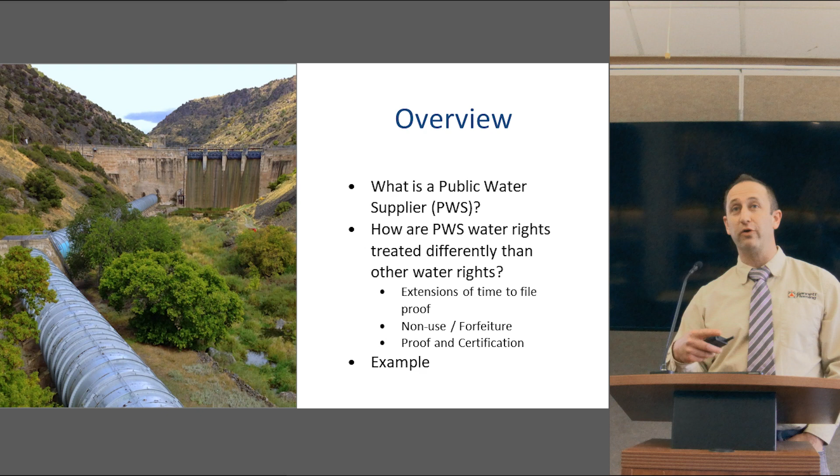So anyway, the first is a public entity. That's real easy. That'd be your municipalities, your counties, the state, a department of the state, the United States of America, or any of their departments. The next is a water corporation, as defined in a different code, it's not 73, so this is kind of exciting. It's 54-2-1. And essentially, as long as they are regulated by the Public Service Commission, they're considered a public water supplier.

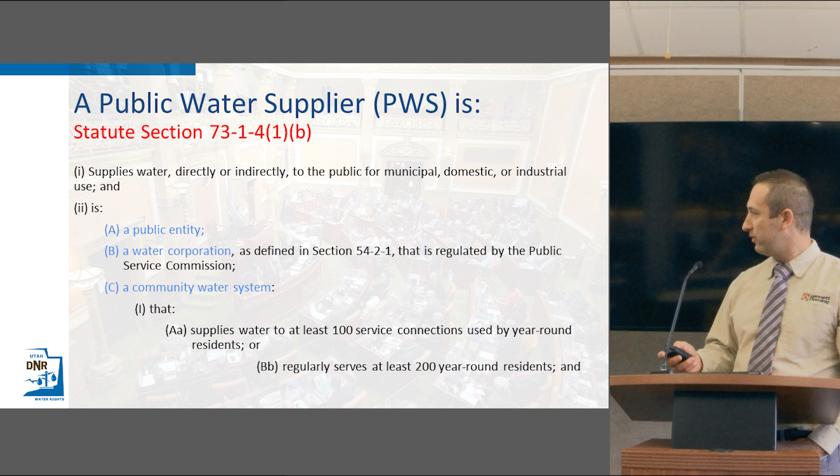The next is a community water system, and that supplies water to at least 100 connections year-round, or I believe it's 200 residents year-round. So it's one or the other. And then it's important to note that those are not the same as the requirements for being a public water supplier for the Department of Drinking Water. Thank you. Yes, sorry. Thank you.

And then it has voting members, this is still continuing on with that. So the members have to own a share in the community water system, and they have to receive their water in proportion to the shares that they own in the water system. And then they have to pay the rates that are set by them.

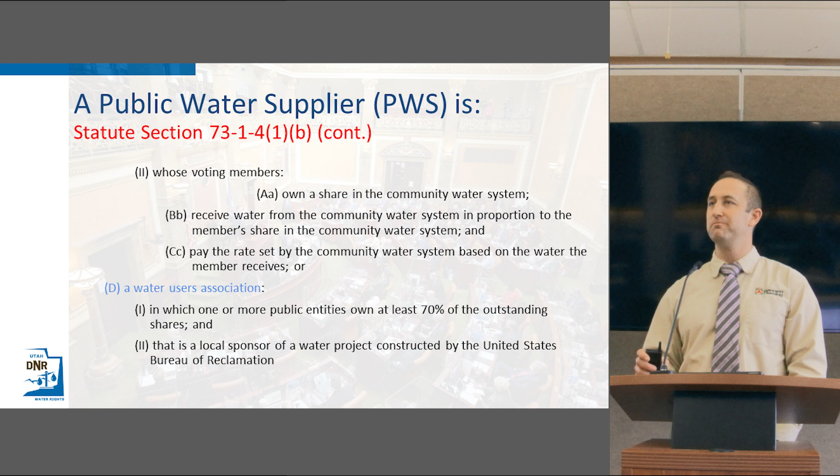The last one, these are really rare because this has an and in it. These are water users associations where a public entity owns at least 70% of the outstanding shares, and they are a local sponsor for a project with the Bureau of Reclamation. So I've heard there's a handful of them. I know the Provo water users is an example of one that actually exists, but I don't know any in my area.

So sometimes people ask, well, how do we become a public water supplier? And I guess the answer is you act like one, fake it till you make it kind of thing. But it would have to be through one of those four ways. And the point here is there's no application. There's no application you submit to us and we're like, oh yeah, you're a public water supplier.

So the first thing is they're treated slightly differently in extensions of time. We'll talk about how a regular water right owner would be treated versus a public water supplier. A regular non-public water supplier would have to show due diligence. So when they get their approval, if they're not complete in a timely manner, they'd have to show that they were working towards completing their project. Like, I ran out of money, that's an example, but they could say, look, we've dug a well, we've started building our house, we've started putting infrastructure in. So that's required, either that or reasonable cause delay.

And then the other thing is they can get extensions, but there are no extensions for a regular person beyond 50 years. So if you're not done in 50 years, you don't get to finish it. Whereas for a public water supplier, really, for the first 50 years, all they have to do is hold a water right. So as long as they hold a water right for the future needs, they're good. It's funny because I get extensions and they'll write paragraphs and really complex stuff. All they need to say is that they're holding it for the public benefit, and boom, it's approved.

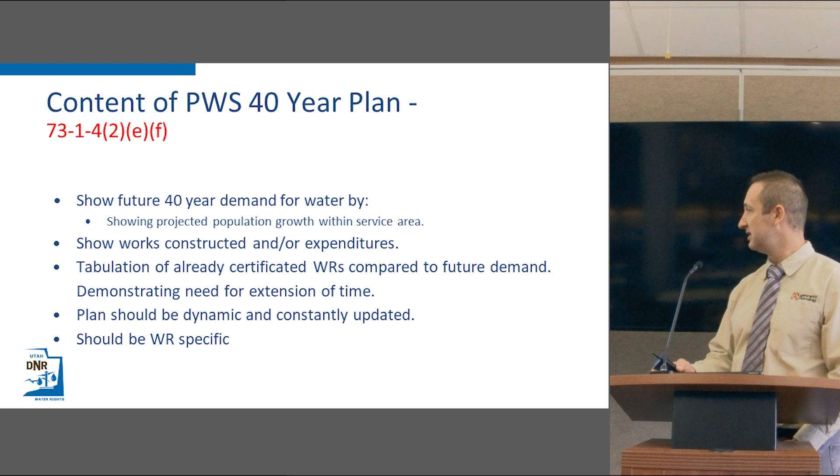And then the plan will be changed because population doesn't always grow the same. Sometimes, like right now, Utah's booming, it's growing fast, but there's certain areas where maybe it's not growing, so it can change over time, and it should be water right specific.

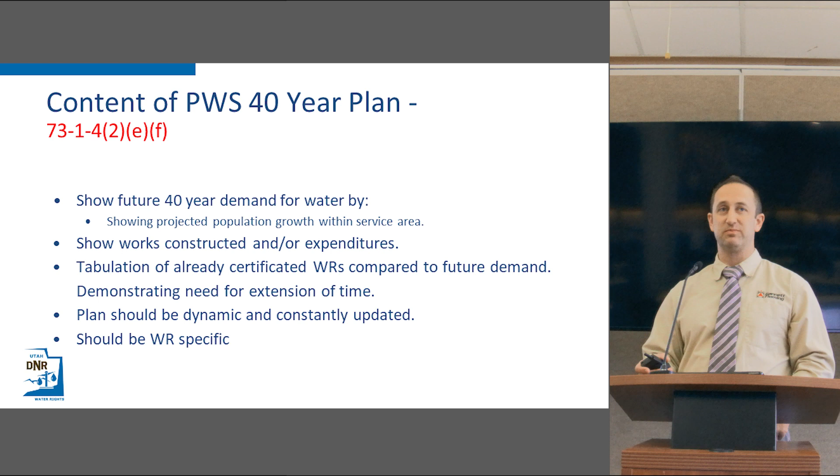So forfeiture, this is also another interesting one. I think they've talked about it a little bit already. But if you're just a regular water right holder, if you do not use your water right for a period of 7 years, you can be subject to forfeiture. So once again, we don't go out and take your water, but you're subject to it. As far as for public water suppliers, prior to 2008, any water right they owned is not subject to forfeiture at all, period. After 2008, if they acquire a water right, they need to get an approved change application before it would be.

We have a question from the chat. It says, are 40-year plans on file with DWR and accessible? So any 40-year plan that is submitted as part of an extension request is public record and will be on the appropriate water right files. But do they mean Division of Water Resources? Because Division of Water Resources also has 40-year plans that municipalities are to submit. DWR, is that Division of Water Resources? It could be, or it could be us. But it's all public record and can be requested. If they can't find it, we can help them find it. Okay, thanks.

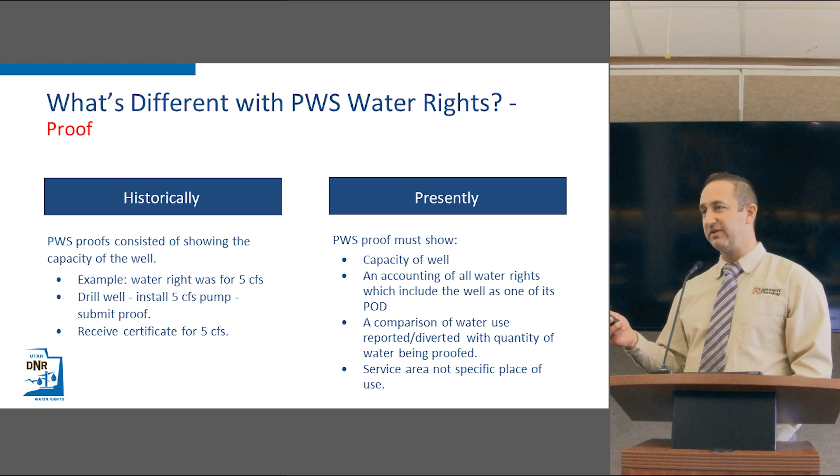And then another thing, they are allowed to just certificate to their service area, which can be changed. So, all right, so here's an example.

So there's a city, whatever the city is, they have 2 water rights, one that diverts 4 CFS, another that diverts 5 CFS for 6,500 acre feet. So they have 2 wells, and the capacity of the first well is 6 CFS, the second is 5 CFS. The 2 wells are reporting info, and what they report to us every year is they're only diverting 2,000 acre feet annually.

For some reason, this city decides to buy a water right from a farmer for 600 acre feet of water, and they file a change application. Now, when the city goes to file proof, what can be certificated? That's the question. And in this case, nothing. And I think the next slide kind of shows this nicely.

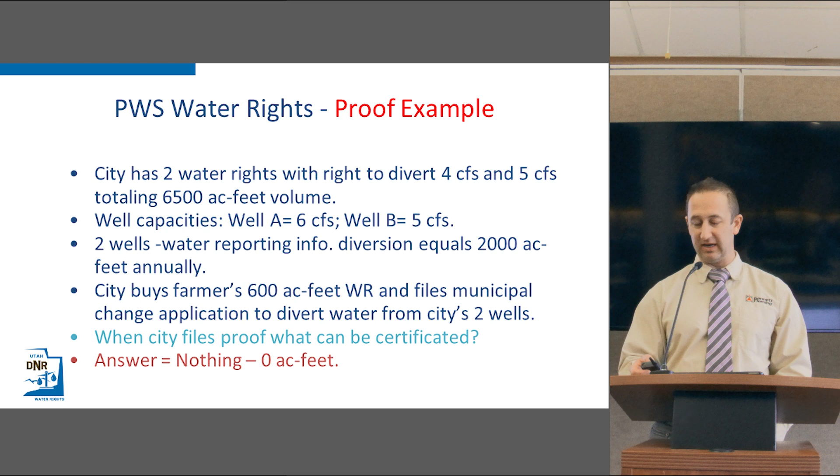So from the things that we check, one, we have their existing water rights. You add those all up, 6,500 acre feet with the farmer's, so they have 7,100 acre feet total. That's great. The capacity of the wells was sufficient. So right there, you see the capacities are greater than their total 7,100 acre feet. That's fine. But they're only using 2,000 acre feet.

We're not going to certificate those water rights because they're not using more water than they already have certificated. And that's the big thing with these. So then, we have to say, hey, you're probably going to be best served to withdraw your proof because you have no additional water to prove up on right now.

So in that instance, would it be beneficial and possible for the city to prove up on this farmer's 600 acre feet? Because that just as likely as not has an older priority. Can you prove up on a portion of what you are using? So his question is, shouldn't they prove up on the farmer's water right? The problem is that they already have water rights that are perfected. So water rights 1 and 2 are perfected.

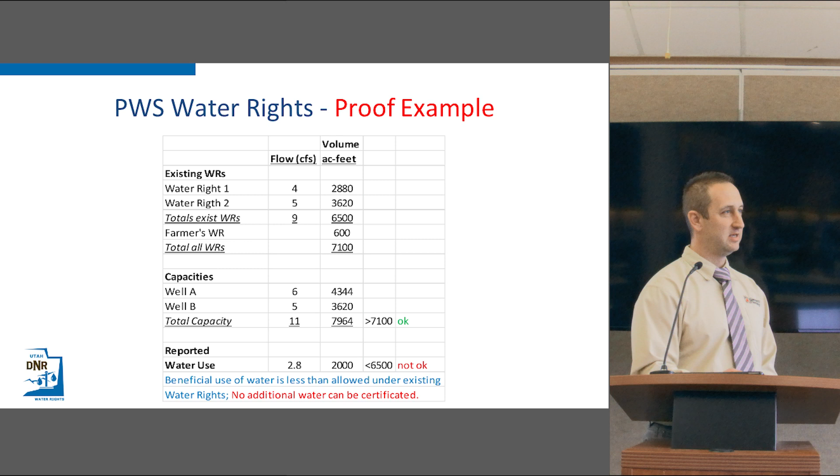Yeah, so the existing water rights are already there, and additionally, which we won't get into, I think they'll get into it later, you also have priority of change versus the actual priority, which can complicate things. But in this case, they already have water rights that are existing, so you couldn't do what you're suggesting.

Can you go back on just the basics? Is a perfected water right the same as one that's already been proved up on? Yes. So a perfected water right is the same as something that's already been proved up on. Yes.

Yes, sir, question. Well, how long's your question? I don't feel like repeating too long, so.

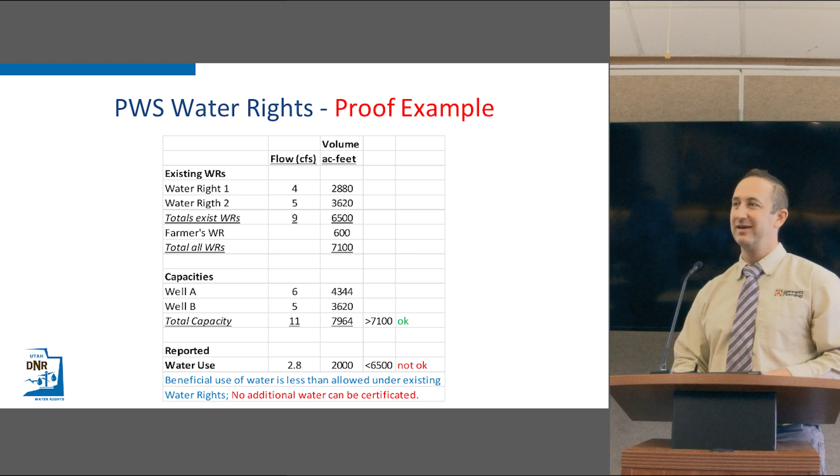To perfect the farmer's water right, the developer brings in that water, but he's in the process of going through the city to get the development done. Can't you give an extension on that if the development's not complete? Sure, so yes, in this case, you would give them an extension. That's exactly what they'd want. They'd want to file an extension, push it off down the road. You just can't perfect it. The last step of the water right, where you file proof and get it certificated, you can't certificate water that you're not using. So, yes.

And then this is another way that they're treated differently. Normally, if you're using water in one place and you decide to expand it, use it somewhere else, you'd have to file a change application. Public water suppliers, as their service areas change, can use water in those areas as long as no other things are being changed, points of diversion or quantities of water. So I think that's pretty much it.

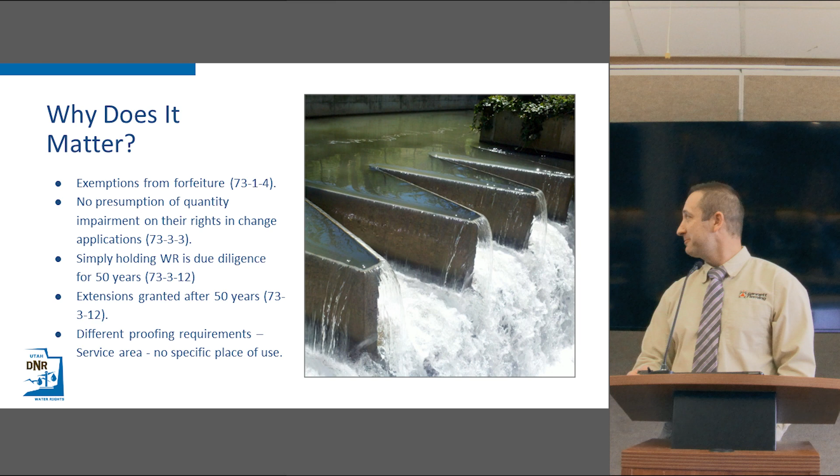Okay, here's why it matters. We pretty much went over all this. You can read this. Does anybody have any questions or feel like they get this, or that I've totally ruined it? Whatever. Nobody. Okay, thank you.